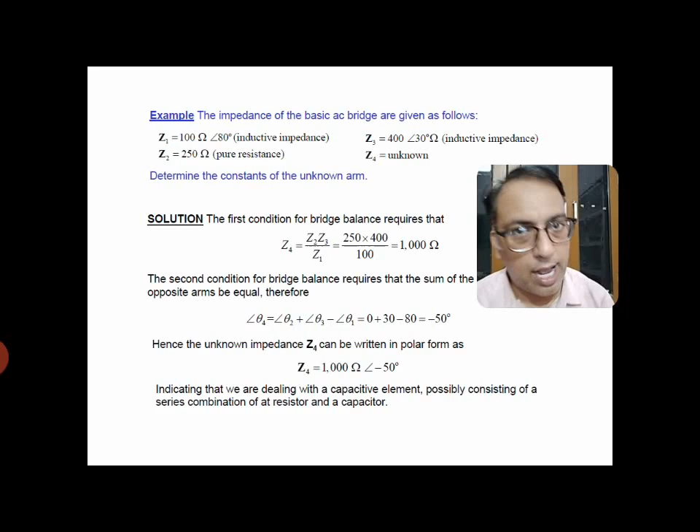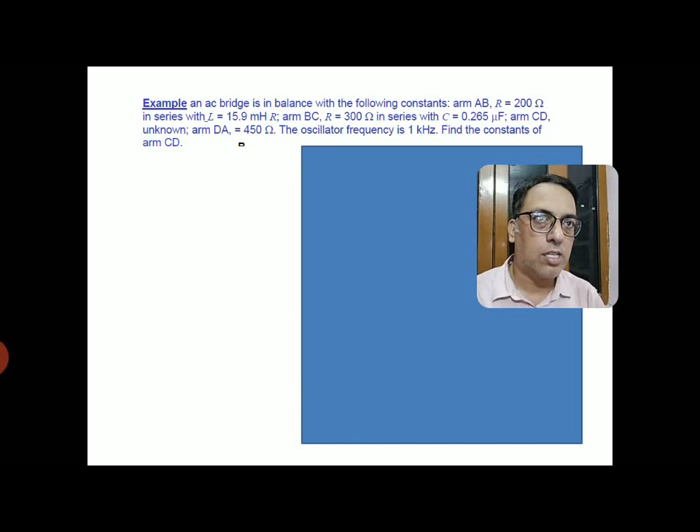Okay, an AC bridge is in balance with the following constants. Arm AB equals R equals 200 ohm in series with L 15.9 millihenry. Arm BC is R equals 300 ohm in series with C equal to 0.265 microfarad. Arm CD unknown, arm DA is 450 ohm. The oscillator frequency is 1 kilohertz. Find the constant of arm CD. This is the required figure.

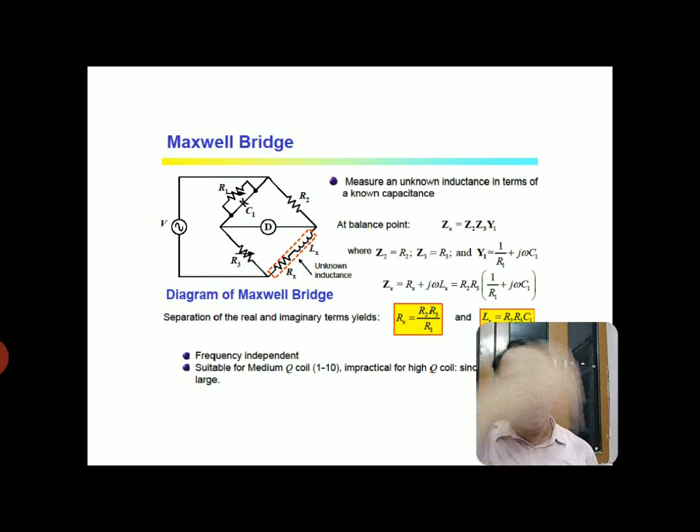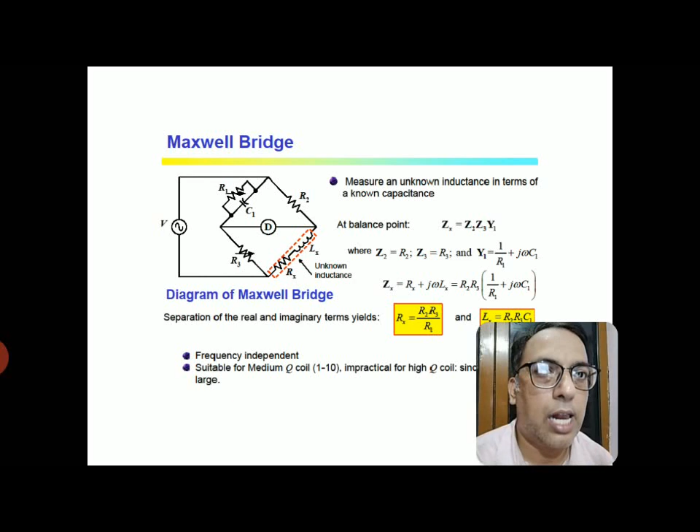Now let us calculate the different impedances. Z2 will be simply R2, Z3 is R3, and Y1, that is admittance.

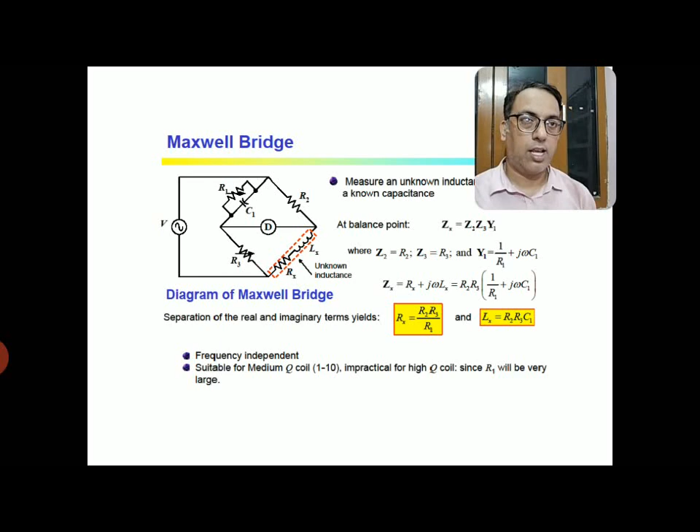For high Q value, we use a second bridge, which is known as Hay's bridge. Hay's bridge is again for measuring the unknown inductance.

Okay. The next Hay bridge, ये almost Maxwell bridge की तरह ही है। वहाँ पर जो R1 and C1 parallel में था, यहाँ R1 and C1 are in series, ठीक है। Now we apply a balance condition over here, तो यहाँ पर जो बैलेंस कंडीशन निकल के आएगी that will be Z1 Z4 equals to Z2 Z3.

Z1 जो है that will be simply R1 with capacitance, उसका जो reactance होगा that is 1 by j omega C1, Z2 का R2, Z3 का R3, and you have to finally calculate the unknown impedance of an inductor. Now substituting these values in the balance condition, you will see that R1 plus 1 by j omega C1 in the bracket into Rx plus j omega Lx equals to R2 R3.

Now expanding on both sides, we get R1 Rx plus Lx by C1 minus j Rx by omega C1 plus j omega Lx R1 equals to R2 R3. Now comparing the real and imaginary parts, you will finally get R1 Rx plus Lx by C1 equals to R2 R3, and another equation, Rx by omega C1 equals to omega Lx R1. Now here we have two unknowns, Lx and Rx, and two equations.

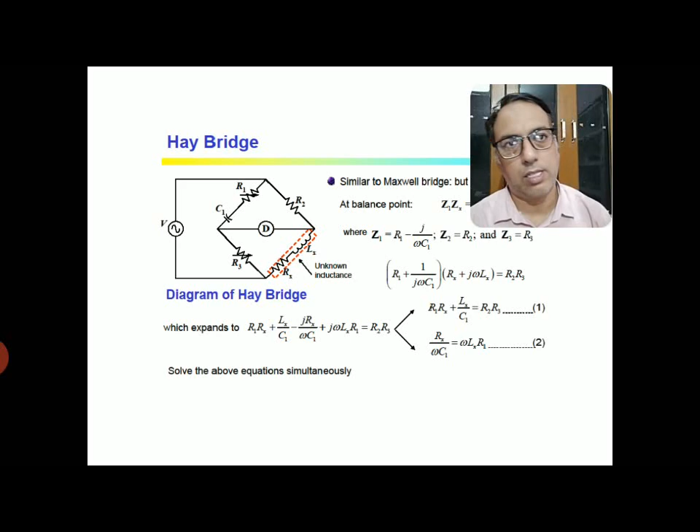That means you have to solve these two simultaneous equations, which give the value of Rx: Rx equals to omega square C1 square R1 R2 R3 upon 1 plus omega square C1 square R1 square, and Lx can be written as R2 R3 C1 upon 1 plus omega square C1 square R1 square.

Okay, now compared to Maxwell bridge, the unknown which we are calculating here is totally dependent on the frequency of the source. There is an omega term which shows that this bridge is totally dependent upon the frequency of the source applied. Now let us write this equation in the form of quality factor.

tan theta L is nothing but XL by R, which is omega Lx by Rx, which is the quality factor of the inductance used here as an unknown. Similarly, tan theta C, which is Xc by R, giving 1 by omega C1 R1, is the quality factor of the capacitor in the balanced arm. If you equate both, you get Q is equal to 1 upon omega C1 R1.

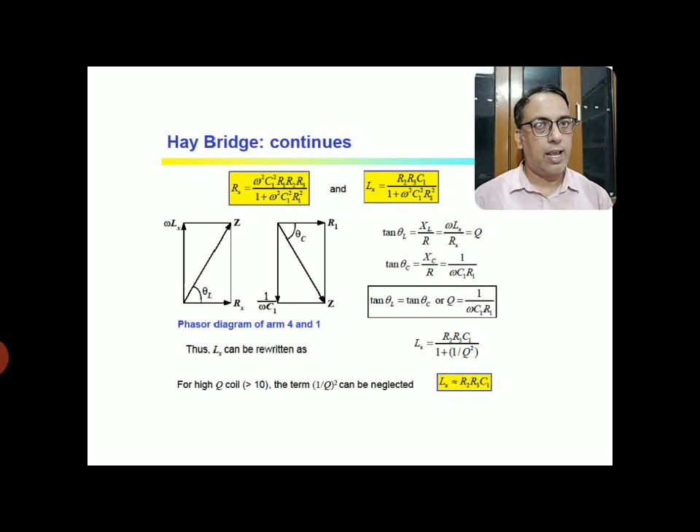This equation shows that the Hay bridge is used for unknown inductances having a higher quality factor, compared to the Maxwell one, where we need lower Q values. This is the basic difference between Maxwell and Hay bridge. For unknown inductance with low Q we use the Maxwell bridge; for high Q we use the Hay bridge. Okay.

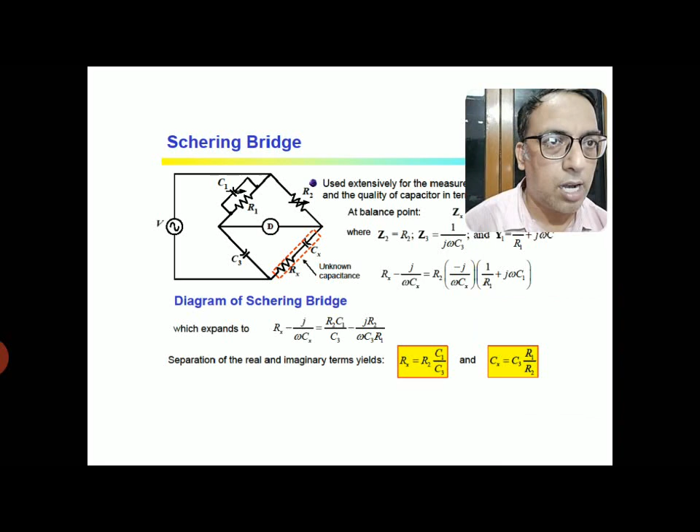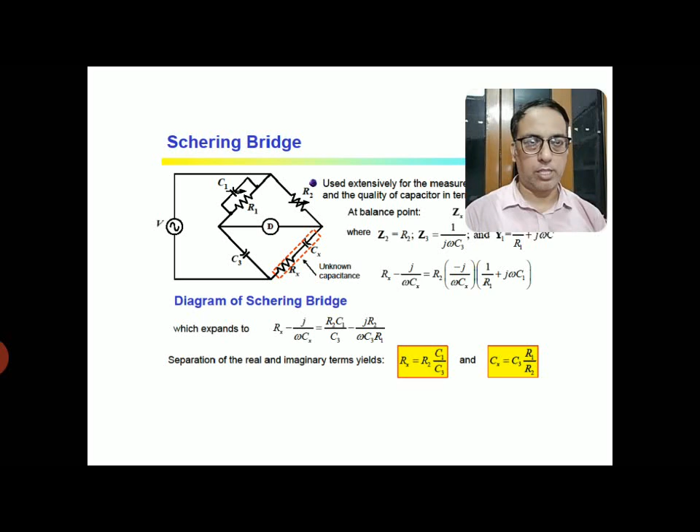Now, if you expand the right hand side, you will be getting R2 C1 by C3 minus j R2 by omega C3 R1. Again, comparing the real and imaginary parts, you will be getting Rx is equal to R2 C1 by C3 and Cx is equal to C3 R1 by R2. This is one of the simplest bridges used for measuring the unknown capacitance, the Schering bridge. Now let us move to the next one.

Okay, you can also calculate the dissipation factor of the capacitor using this, and dissipation factor is nothing but Rx by Xx, which is nothing but omega Rx Cx. So for the Schering bridge, omega Rx Cx will be nothing but omega R1 C1. So after balancing using the variable resistance and capacitor, whatever values you get for R1 and C1, using those you can also calculate the dissipation factor of the capacitor.

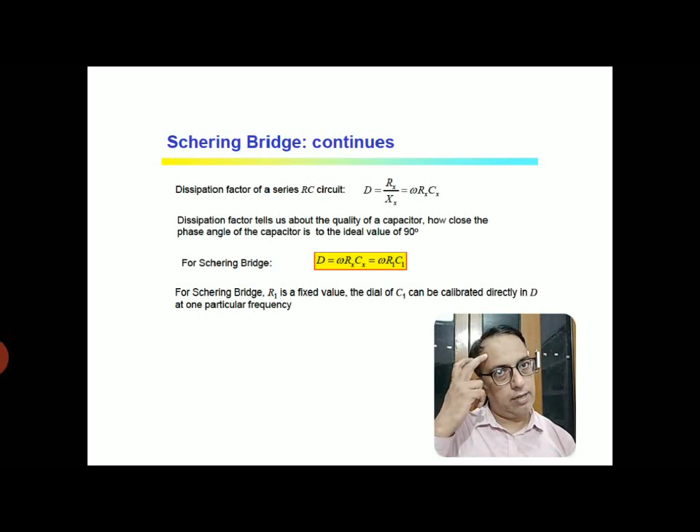Actually, the dissipation factor is an important parameter for a capacitor which tells us about the quality of the capacitor: how close the phase angle of the capacitor is to the ideal value of 90 degrees. This is basically given by the dissipation factor. So in some cases, we also need to know the dissipation factor of the unknown capacitance, and we can use the Schering bridge for that. Okay.

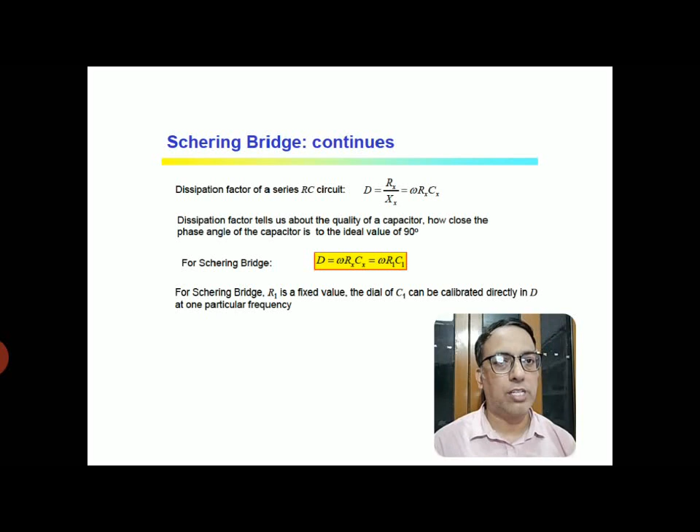Now let us move to the last AC bridge. There are several other bridges, but these four bridges are very, very important. The final one is the Wien bridge, which is used to measure the unknown frequency of the source. Here you have all the impedances known to you. By varying R3 and R1, you have to make it balance and finally calculate the frequency of the voltage source.

Now again, using the standard AC bridge balance condition, which says that Z2 equals Z1 Z4 into Y3. Z1 is R1 minus j by omega C1, as there is a series combination of R1 and C1. Z2 is simply R2. Y3, for the parallel combination, is the addition of the admittances in the parallel branches, that is 1 by R3 plus j omega C3, and Z4 is equal to R4. Now simply substitute all these values in the balance condition.

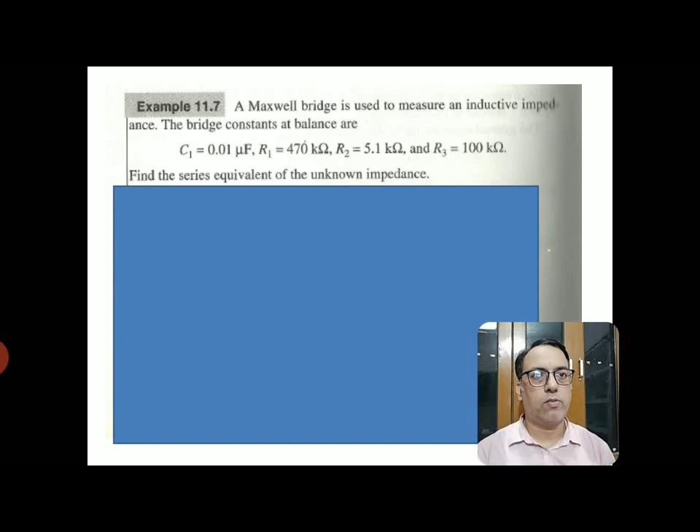Let us do some numericals on these bridges. Here a simple question is given to you. Maxwell bridge is used to measure inductive impedance. The bridge constants at balance are C1 equals 0.01 microfarad, R1 equals 470 kilo ohm, R2 is equal to 5.1 kilo ohm, and R3 equals 100 kilo ohm. Find the series equivalent of the unknown impedance for the case of Maxwell bridge.

Let us calculate by simply using the formula of Maxwell bridge, where Rx is R2 R3 by R1, simply putting the value of R2, which is 5.1 kilo ohm, R3 is 100 kilo ohm, upon R1, which is 470 kilo ohm. After calculation, you will be getting 1.09 kilo ohm.

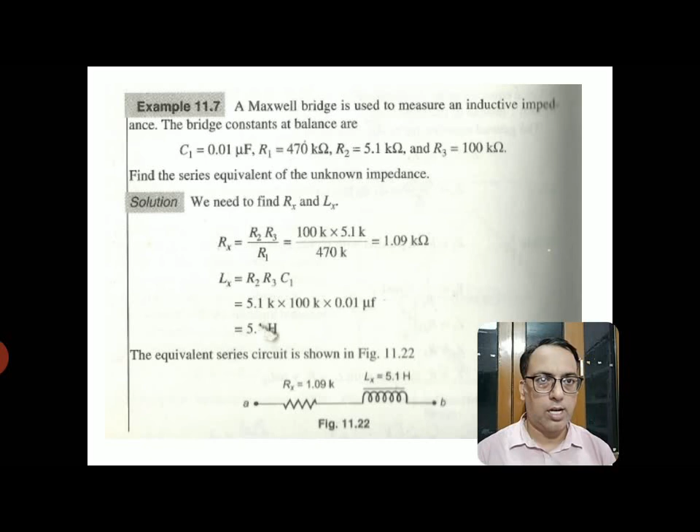Lx is R2 R3 into C1. Simply put the values: R2 is 5.1, R3 is equal to 100 kilo ohm, and C1 is 0.01 microfarad. After calculating, you will be getting 5.1 Henry. So you can have the unknown as shown in figure, Rx equal to 1.09 and Lx equal to 5.1 Henry. This is one of the simplest questions, and let us move to the next.

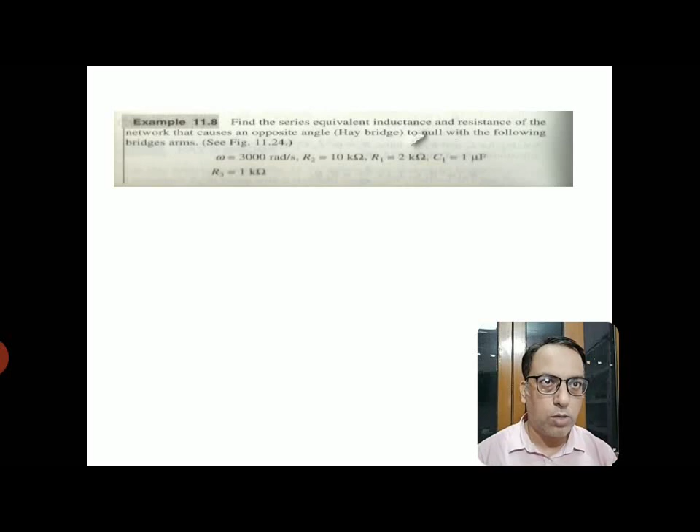Find the series equivalent inductance and resistance of the network that causes an opposite angle Hay's bridge to null with the following bridge arms. Here he's saying to refer the figure of Hay's bridge. Omega is 3000 radians per second, R2 is 10 kilo ohm, R1 is 2 kilo ohm, C1 is 1 microfarad, and R3 is 1 kilo ohm.

Let us again use the fundamental formula of Rx, which is omega square R1 R2 R3 C1 square upon 1 plus omega square R1 square C1 square. Simply substituting the values: omega is 3000, so 3000 square, R1 2, R2 10, R3 1, C1 is 1 microfarad, putting 1 into 10 to the power minus 6 in the denominator part. After calculating, you will be getting 4.86 kilo ohm.

In the same way for Lx, R2 R3 C1 upon 1 plus omega square R1 square C1 square, which gives you the value for Lx. Now substituting all the values as per the question, R2 is 10, R3 is 1, C1 is 1 microfarad, 1 plus omega square, omega is 3000 square, and R1 is 2 again, C1 is 1 into 10 to the power minus 6 square. After calculation, you will be getting 270 millihenry. Therefore, Rx is 4.86 kilo ohm and Lx is 270 millihenry.

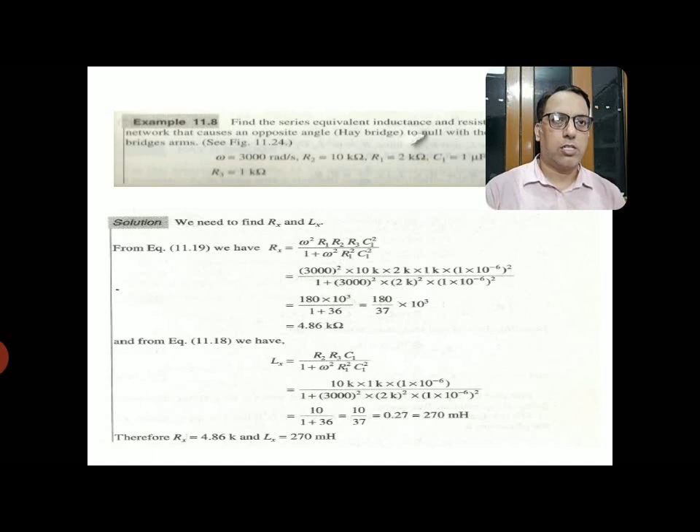This was again a simple formula-based question. You are having the constant values, and you have to simply put them in the equation of unknown resistance and unknown Lx, and you will be getting the answer. Let us move to the next question.

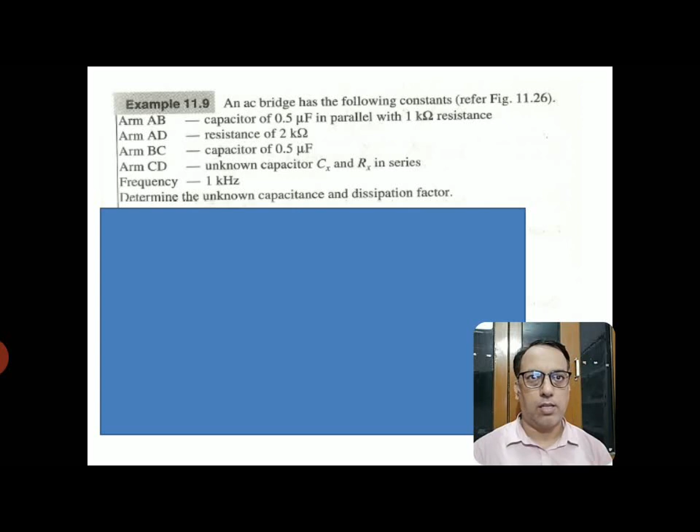Next question: an AC bridge is given to you with the following constants. You have arms AB, AD, BC, CD: capacitor of 0.5 microfarad in parallel with 1 kilo ohm, resistor of 2 kilo ohm, capacitor of 0.5 microfarad, and CD is our unknown capacitance. This is the question regarding Schering bridge. You simply have to use the Schering bridge

figure, and use the relationship for the Schering bridge, which gives you Rx equal to C1 by C3 into R2, which is 0.5 by 0.5 into 2, giving you 2 kilo ohm, and Cx equals R1 by R2 into C3, 1 by 2 into 0.5, which will give you 0.25. You will be using the figure of the Schering bridge.

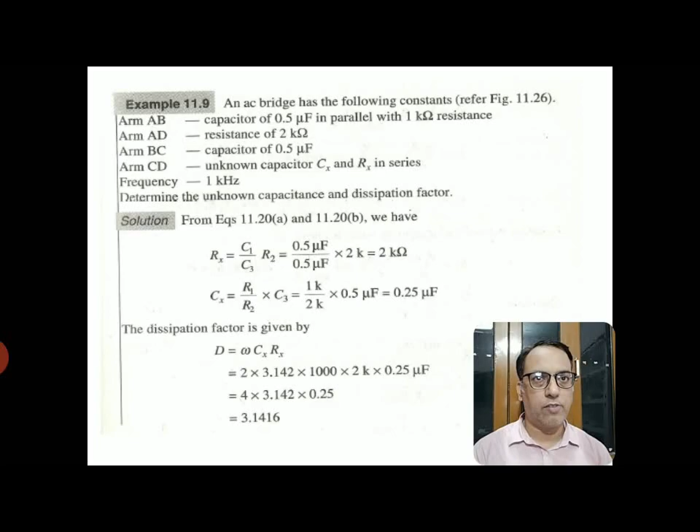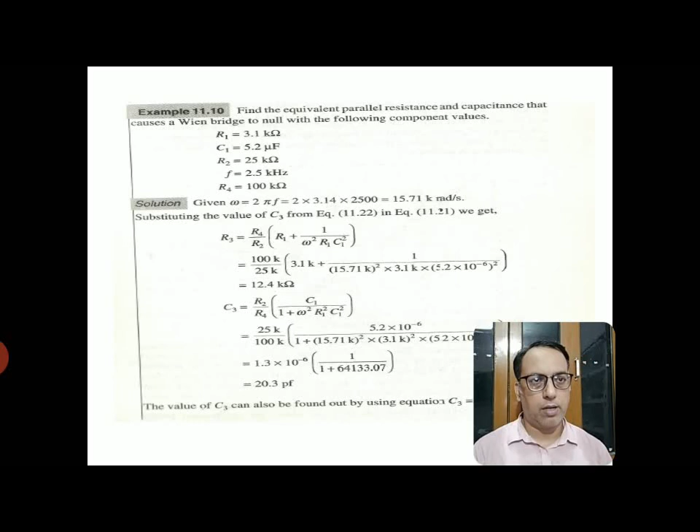With this we have seen the AC bridges from which we can calculate different impedances. Now in the next lecture we will be seeing the ohm meters which were left at the beginning, and complete the ohm meter to measure resistance. We will be seeing that in the next lecture.